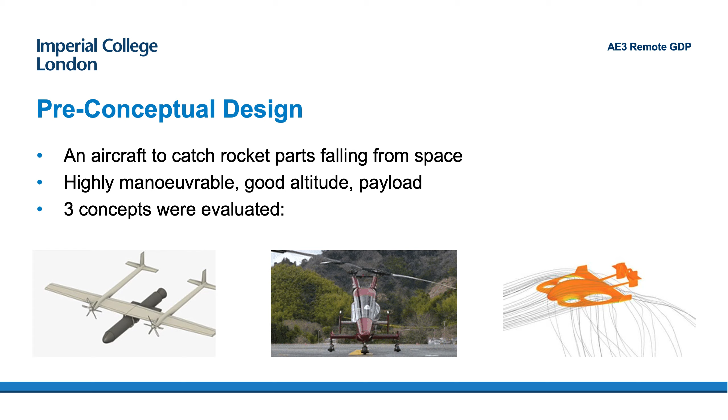So we took 3 different concepts, pre-conceptual designs of what kind of aircraft we could have to recover a falling rocket payload. So we had an aircraft design in the bottom left. We evaluated a helicopter, which is in the middle. In particular, this is a synchropter, so it's a dual-bladed, dual-rotored kind of helicopter design, and we also went for more exotic kind of tilt rotor, tilt fan ideas. Basically, we needed something which could go to a decent altitude to collect a very large payload and be highly manoeuvrable. So the rocket would essentially fly up, fall back down from space when we catch it.

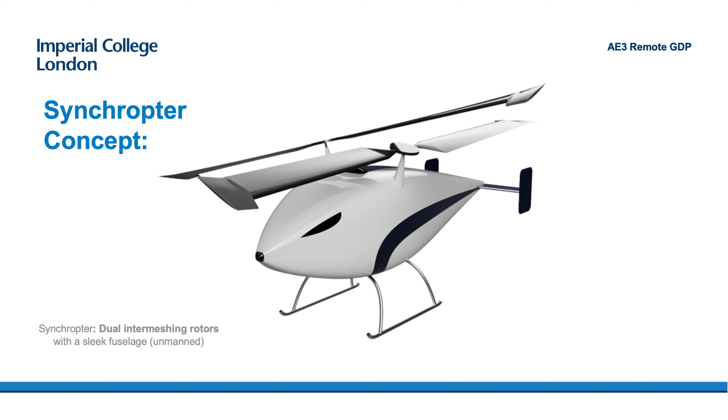So the concept we went for was the helicopter, and we ended up designing this, which is a synchro-capture, as we named it, which is a synchropter, so it's a dual-bladed unmanned aerial vehicle, which is also a helicopter in style, which can go up to an altitude of about 20,000 feet and recover a rocket payload as it's falling.

So on the bottom right, we've got a basic mission profile for what we're trying to do. So the rocket takes off, it splits off, the first stage booster falls down, it's got a drogue chute which expands to a parafoil, it then glides down and we capture it with this helicopter, we drop it off on a ship, so it's a naval-based helicopter as well, and then we essentially do the same for the upper stage when it also returns, which is something totally novel and is not currently done.

So essentially we need a really beefy helicopter to get up to that kind of altitude, 20,000 feet, where we wanted to try and have our maximal ceiling to carry a very large payload, which was half of the maximum takeoff weight with the payload. So that was what we intended to do.

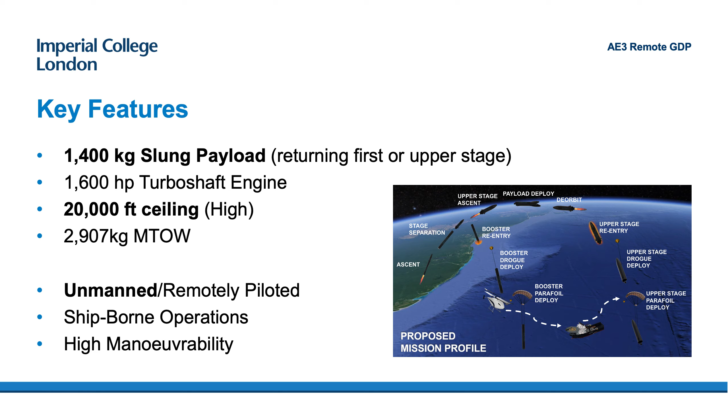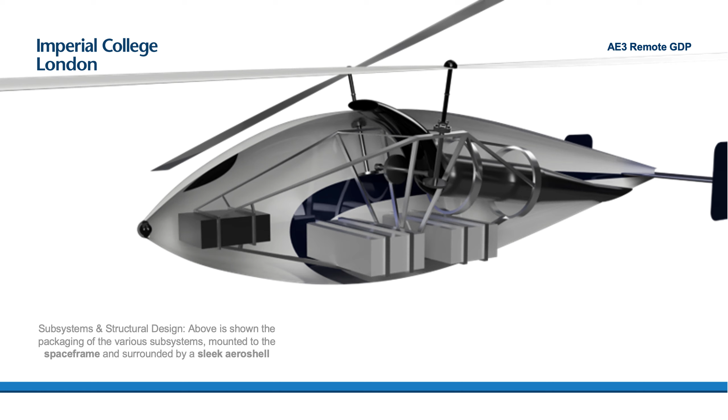So the helicopter itself was designed using every tool we had available for us in a remote setting. This involved a lot of generative structural design, which I'll go into, a decent amount of finite element analysis, which you learn early in third year at Imperial. And also we did things like engine performance simulation, which built on the second year turbomachinery course, and also the third year advanced propulsion for those students that took it this year.

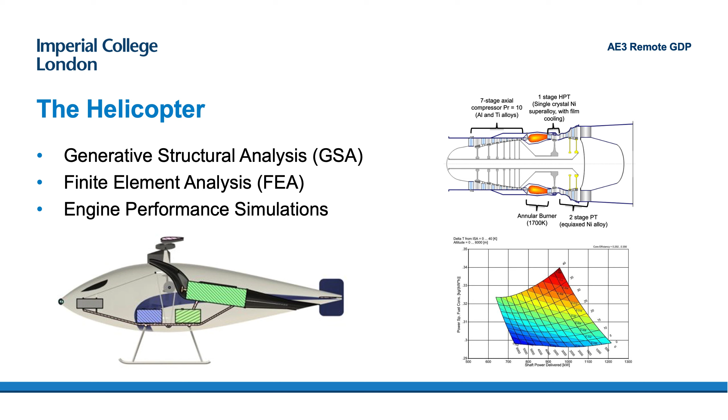So we've got systems layout in the lower left-hand design, which also shows you the slanting of the engine and the transmission. I'm going to try not to go on about the transmission too much, but that was my little baby. That was what I worked on. So in terms of the transmission, it's the next slide.

This is the transmission. So essentially, I designed it for a very high efficiency to carry that power through from a 1,600 horsepower engine which was operating at 12,000 RPM, straight through to the actual rotors themselves, which have to travel a lot slower so as not to breach any kind of sonic requirements and shake themselves apart.

Being remote working, one of the things for me was the fact that I didn't really have access to any CAD software at home. I didn't feel like remote booting one of the college machines to do it, so I ended up relying a lot on hand drawings and PowerPoint, hence a slightly crude drawing on the right. But we built in some fairly detailed stuff to it, including a health and usage monitoring system to detect ferrous shards in the transmission itself.

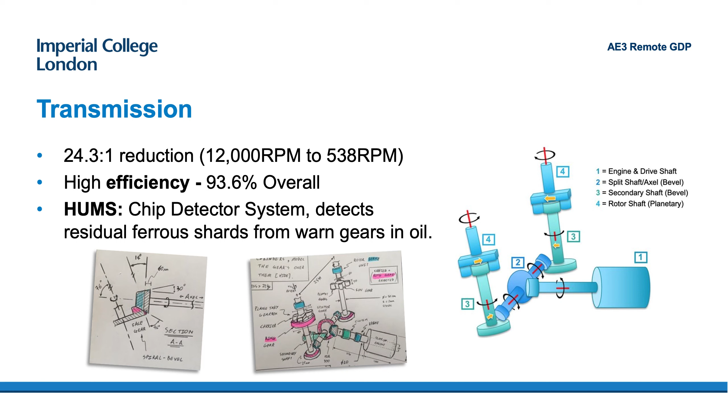In terms of a bit more on our electronic design process, because of how far software has come on and the fact that everything was done remote, we were almost pushed more into seeing, well, what could we do which totally wasn't in person? So we ended up relying on a lot more machine learning optimization in various things, such as even the mission profile itself, and computational fluid dynamics, which is a third-year option course for those of you who want to take it, and it's also covered later in fourth year in advanced computational aerodynamics.

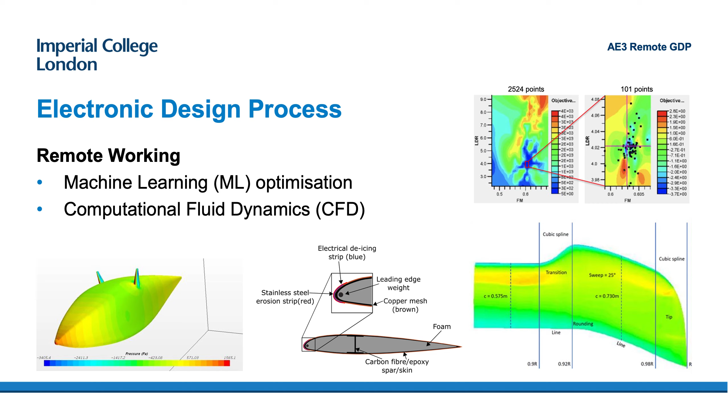So this modelled things like the rotors, which are a weird spade-like device called a BERP blade tip, which is shown in the lower right-hand side. I had a friend work on the structural layout of the rotor as well, so he was working closely in tandem with the guys in the aerodynamics section. And the aerodynamics section also governed the aero shell we had, which is shown on the lower left. This is using a software called STAR-CCM+ and also ANSYS Fluent.

The recovery mechanism was done by a member of my direct subgroup, so I was in the subsystems and propulsion group. So this covered things like the transmission, the oil system, the engine, but also the actual capture mechanism for this capture instant when the helicopter swoops down and catches this parafoil-laden rocket part as it's descending from its post-planetary journey.

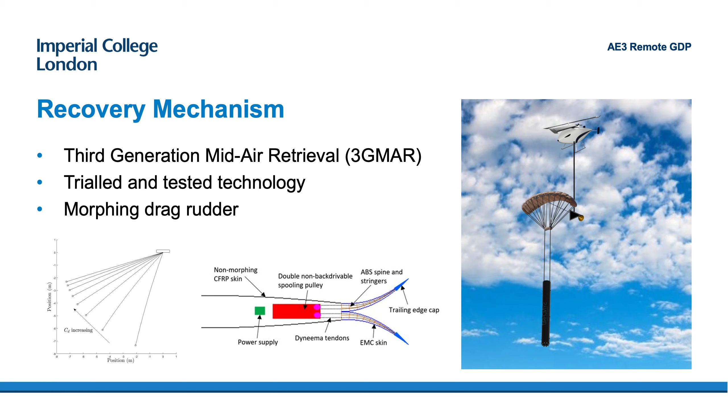So in terms of the design mechanism itself, it was building on existing technology which was pioneered by the CIA in the 60s for recovering spy satellite photography and actual film, but also used unique features such as morphing airfoils, which is something which hopefully we'll see a lot more of in the future. So not conventional flaps and slats as you'd find, but actual splitting rudders and using little piezoelectric devices to try and control the drag exactly, to try and match as much as you can these velocity vectors when you try and capture these things.

In terms of the modelling and simulations, we had a lot of colleagues working on the flight mechanics modelling of a helicopter, which is difficult, and especially when it's got two rotor blades, it's more than twice as difficult because you've got all these kind of wake interactions coming off the rotor blades. They also used X-Plane to build a model, and it did actually fly, which I was pretty happy with, and it was darn manoeuvrable and nimble when it did.

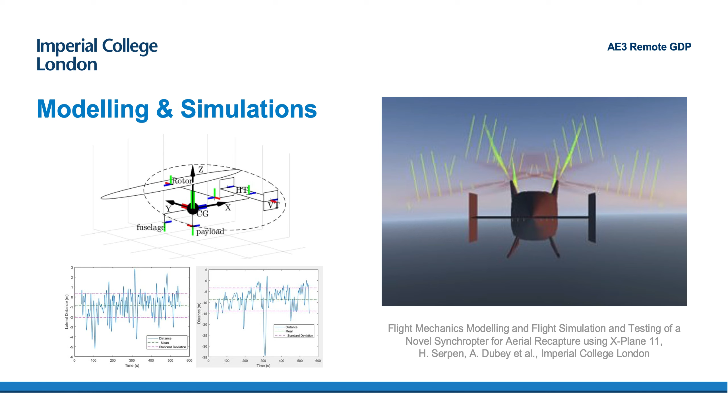So how do we achieve this whilst working away from campus for 6 weeks post-exams, which were also done remote? Essentially, we relied on Microsoft Teams and remote working for almost everything. So this is how we coordinated 25 of our students on the recovery side, 50 in total, including the people who are actually building and designing the rocket themselves, and students who were spread all across the globe. So I had a lot of colleagues in Singapore, the Americas, the Middle East. So we're working with a big time difference, which brought up its own issues.

So essentially, we ran everything remotely across Microsoft Teams for the recovery team. So that was the helicopter design group, and then the launch team had Slack, which is another service which can be used for remote working. All of these projects were student-led, so we had 3 highly capable students who were selected pretty much at random, who led us and led a group of 25 other students, which is a great thing.

And we had one centralised communication channel through Teams, and it was great. You could get anyone whenever you wanted. We had a great degree of freedom, and especially decisions were allowed to be made at a ridiculously low level as long as you kept everyone else informed. With the launch team as well, for anything like the payload size itself, we used a third-party website called Valor Space, who were able to sponsor the actual launch team on what they needed to do.

Meetings were organised when needed. We were able to host meetings online and get pretty much everything we wanted to do done exceptionally efficiently. There was a bit of conflict resolution at some points, but it was a great experience. A good friend of mine said that he'll miss the random times of the day calls, which I think we all will, and you'll see what I mean on the last slide.

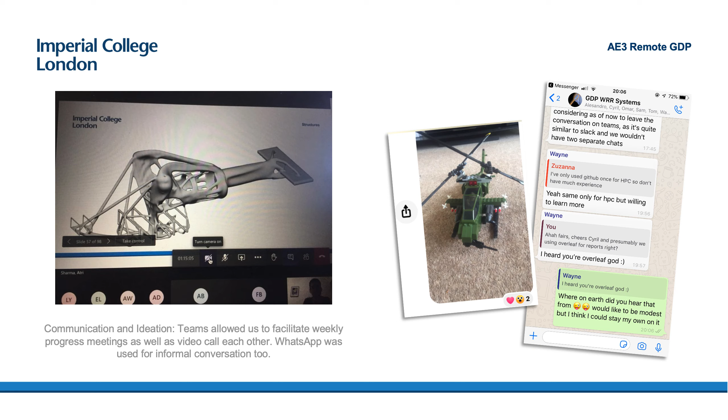So remote working, it's got loads of positives. A 24-hour workday can double your productivity easily. Flexible working hours, you can work whenever you want. The only problem is that's its own negative, because you have to work at some point, but it's very nice to put it off. Just like your location of work, it'd be brilliant to be working in the office environment on campus, in a lecture theatre, in a PhD study room with your peers and colleagues, but you can't, so you need to try and work where you can from home, which brings up its own communications and contact issues for different people.

Especially when you've got this time zone delay. That said, being able to work online, there's a clear trail of who's done what, especially if you document it very well and you take minutes of all of your meetings and things like that. But as I've mentioned, concepts can prove very difficult to explain to other students when you're just talking over a screen, which is why it's good to have an engineering practice in terms of what's the standardised way of designing things, and probably only having one or two people on your CAD can sometimes be helpful, as was the case in this project.

What did I get out of it personally? Well, as well as a nice looking report with an obtusely long title, it was an exercise in overcoming obstacles and conveying ideas, trying to work out how best to converse and accept peers' ideas in various things. It showed to me the utter efficiency of online working. As much as can be said to its detriment, I personally found working online to be a lot more stimulating, and also, you get this appreciation for what it's like to interact in person, have your downtime in person, but also move to a more online setting. It was a great proving ground in how to work online.

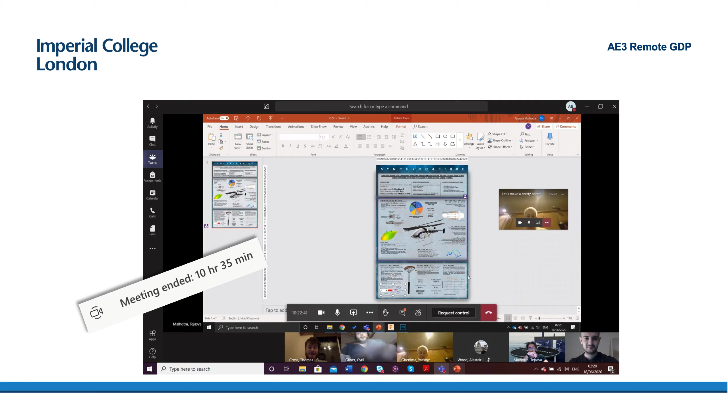Thank you very much for listening. Hope this has been informative, especially to people who are considering Imperial or evaluating how you can still work online or remote in these times. It's definitely possible. I wasn't paid by Teams to say anything on their behalf, but I think it's a great software.